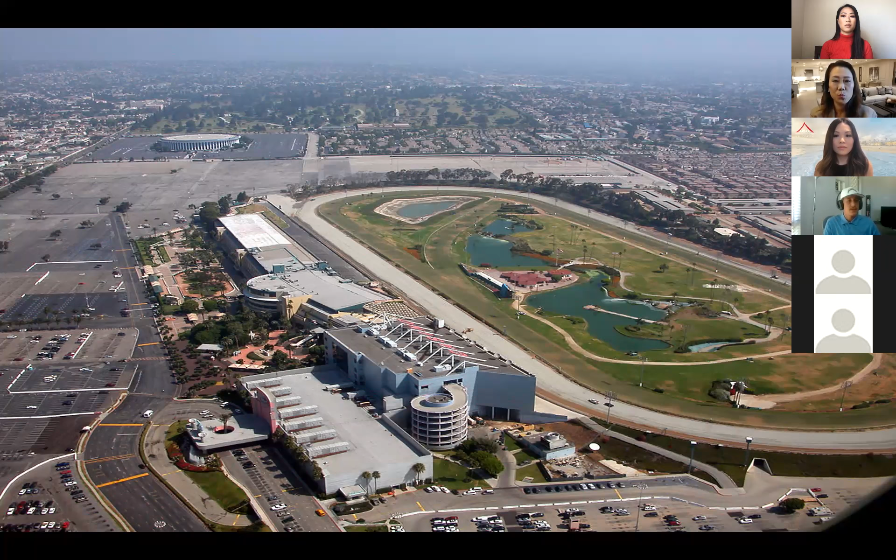So what we're going to talk about today is what this will look like in the future. And really, when we do look at this development, you're going to still see that Forum directly there to the north. So that's still here.

Big news article was out about a month and a half ago - that venue is actually purchased by Mr. Steve Ballmer, who is the owner of the LA Clippers. And so the Clippers, who play right down here in downtown LA at Staples Center, in 2024, when their lease expires, they are looking to move right down here to this plot of land adjacent to our stadium just to the south. And that is going to become their new $1.2 billion basketball arena.

So that'll really create an entertainment belt here in Inglewood where you can go and see a 20,000 seat concert, a 70,000 seat Taylor Swift concert or NFL football game or sporting event, or a 20,000 seat basketball game with the NBA, all within a block, city street block here of Inglewood.

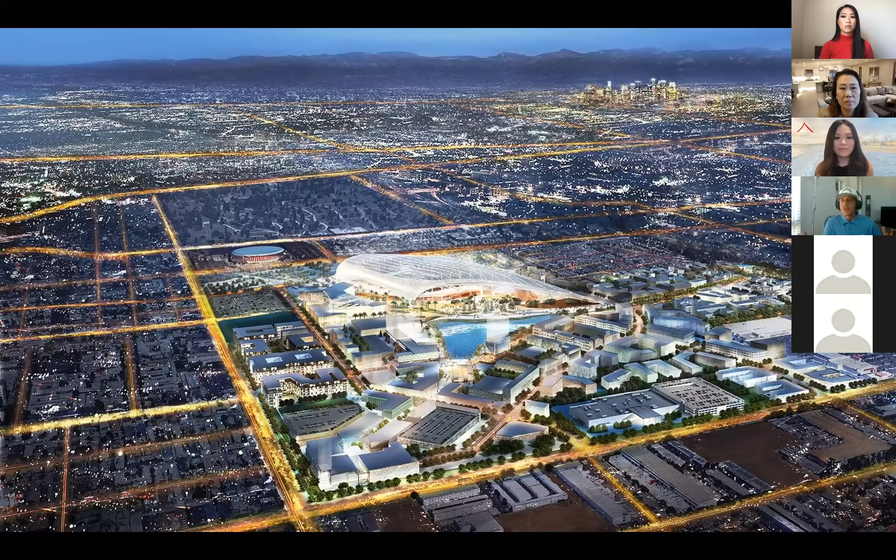And so looking here, obviously the stadium is the wow factor. That's the sexy thing that you've seen all over the news. It's a $5 billion stadium. But as Hiroko mentioned, the stadium sits on approximately 298 acres, which we round up to 300 acres for ease.

And that 300 acres is what you see here. And that 300 acres, in addition to the stadium, will include residential - anywhere from about 1,500 to 2,500 residential homes. It'll include a retail district, and it'll include a commercial district that will all augment that NFL experience and create really a 365-day product that people can come down to year round here at the stadium.

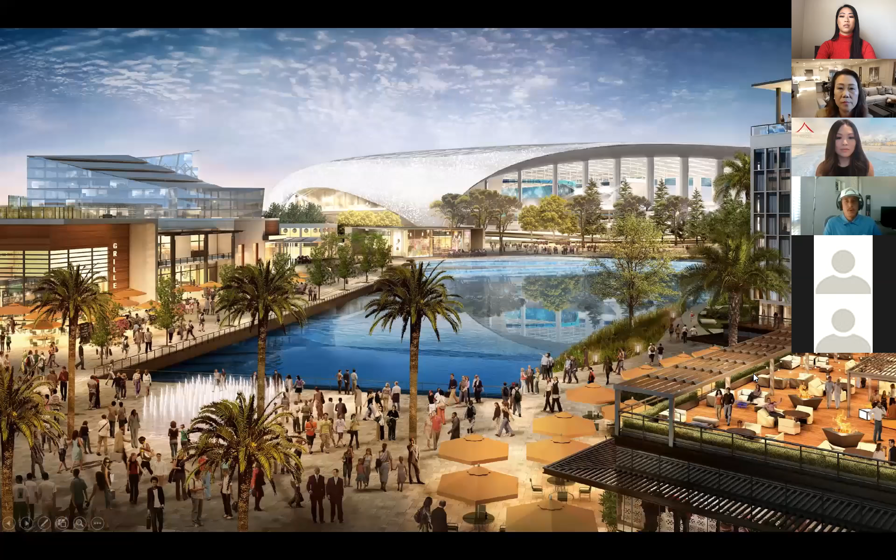Looking here at our next slide, you're going to get into a picture that really kind of showcases this district. And so when we think of the SoFi Stadium, that's our crown jewel, but really taking a couple of steps back, this lake that you see here mimics the old lake that you saw in Hollywood Park's racetrack. And that used to be a community event space where people could go and really kind of do a movie night in the park, trade shows, different types of events.

And that's what we can do here in our community space. This lake actually is part of 25 acres of parkland that connect the different districts together. And as you can see here, you have your bar, your grill. This is the hotel right across the way.

And both of these look directly into that stadium. So the stadium very much is the showcase piece, but these other components will be able to run sufficiently on their own. We expect the mall to be a 365-day mall experience, as with the commercial tenants and the hotel, which can be used year-round as well.

So when we look at this composition as a whole, again, 890,000 square feet of entitlement for retail space. You're talking about up to 8.5 million square feet of commercial. So all this commercial here can also be built on top of these parking lots.

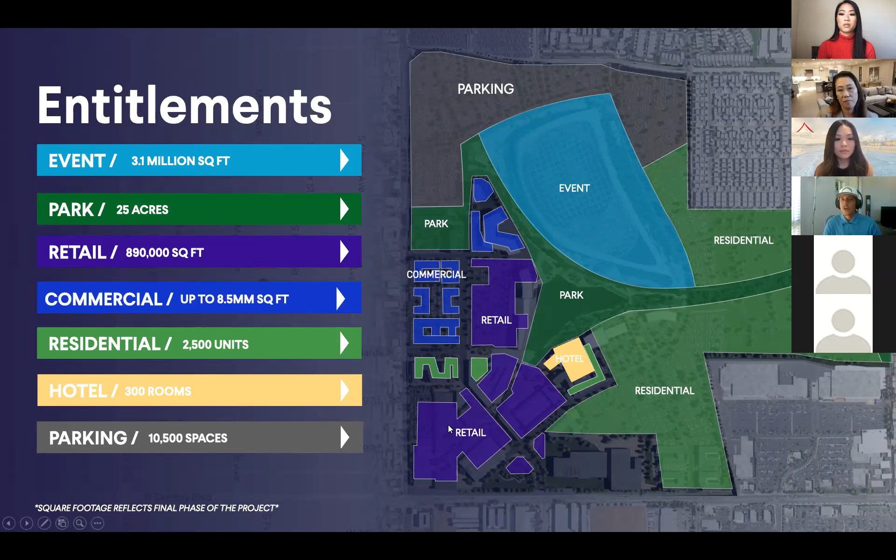You're going to want to be there for that Super Bowl week. And that Super Bowl is scheduled here for February of 2022. And that was when I would imagine that the bulk of the retail and commercial part of the construction will be complete. Here's an aerial view, and this is a view that'll kind of show you what's happening around the stadium.

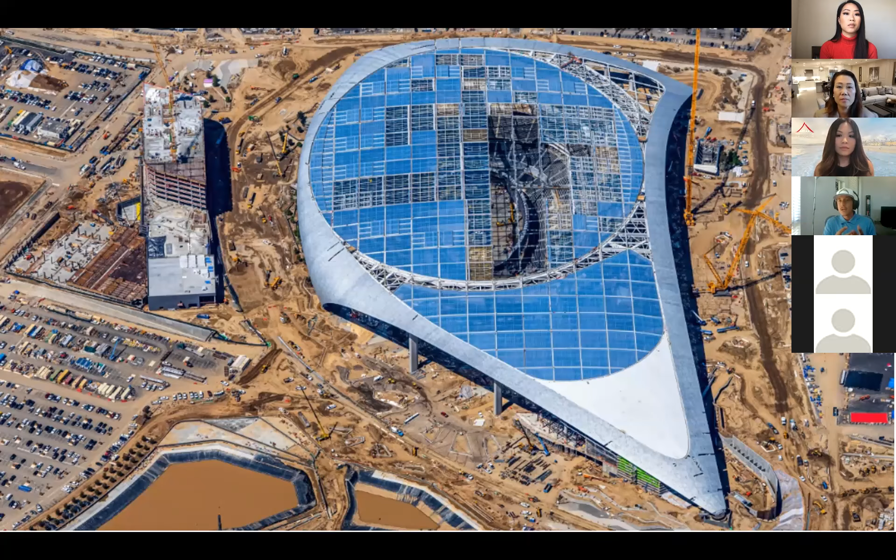And that water has now been treated and is cleaned. That water in the lake is actually runoff water from the district. So all of the rainwater will collect in that lake and be used to water all of the plants and foliage around the property. Here's a more completed version of the picture that we just saw.

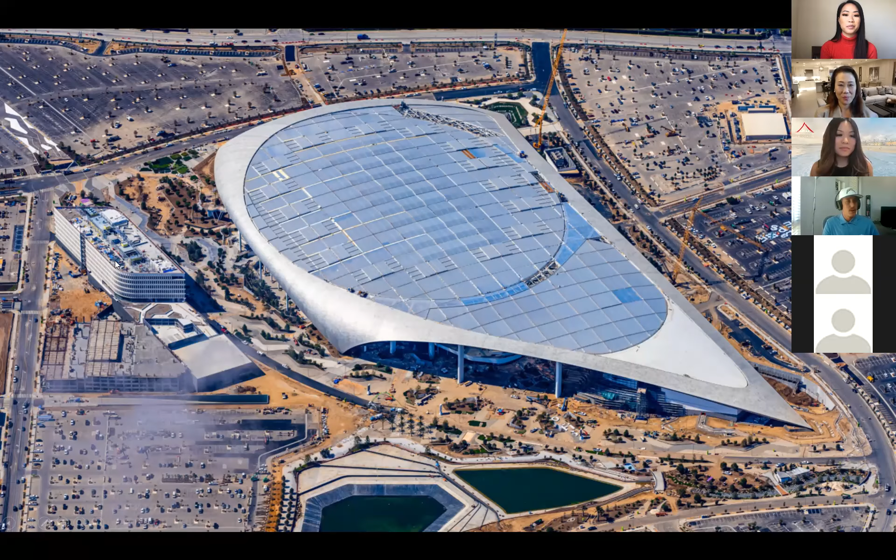And you can see the roof here, as well as that lake now really starting to come into place. You'll probably see me down there in a jet ski by the next picture, just riding across the lake. I wish. I don't think they'll be able to do that down there, but again, you see the commercial building here, the NFL Network coming along.

You know a typical commercial build out takes anywhere from about 18 to 24 months. And so as you can see here with the progress already being made, some of those buildings are going to be done sooner than later, which is really exciting for us here on the project.

The Super Bowl is coming in 2022. In 2021, we'll have WrestleMania, which will draw 100,000 wrestling fans from across the globe to Los Angeles. In 2023, it's the college football NCAA championship, the college football version of the Super Bowl, with 100,000 fans from Clemson and 100,000 from Alabama - sorry if anyone here is from a different school - but those are the big schools coming here to experience Los Angeles.

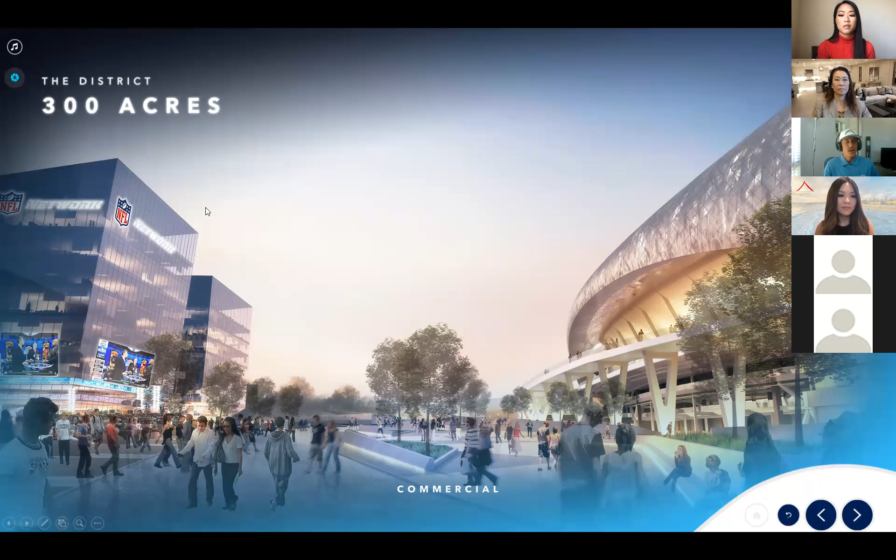So here from the NFL Network building, this is a year-round showcase. We can invite fans from not just the Chargers and not just the Rams, but every one of our NFL teams across the United States can come visit Los Angeles to be part of this NFL Network experience, which is very important to us.

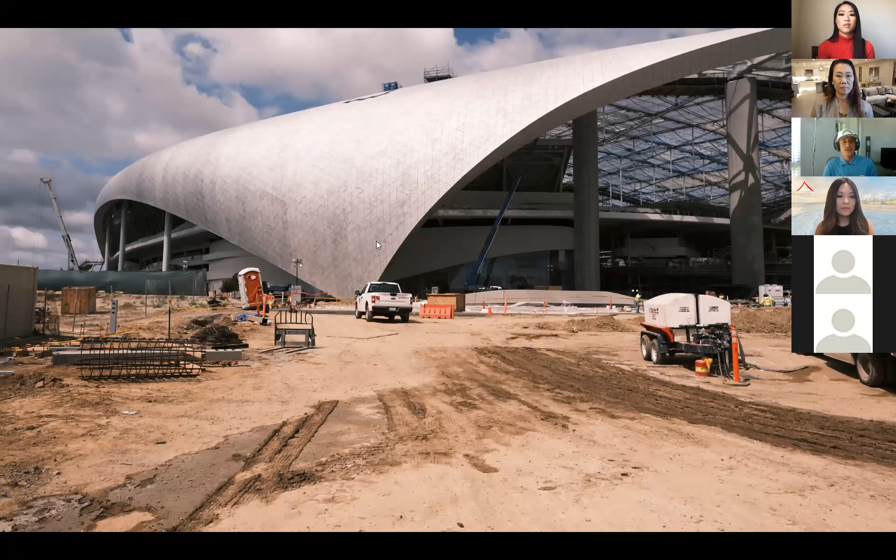This is a view walking into the grand entrance of the stadium - the grand foyer that you would walk into. You'd walk in from that bar or restaurant and then walk right up that stairway into the actual stadium, which is very exciting for us to see that type of progress being made.

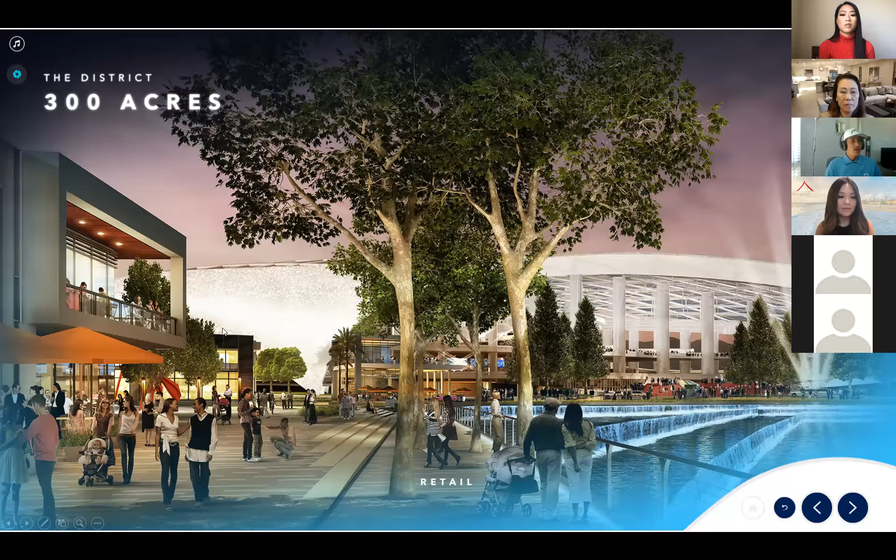Looking at the district, we're very excited to see other components come together. But the stadium itself, obviously with COVID, we've seen a couple of hiccups in our timeline. We were supposed to have our grand opening here this weekend - Taylor Swift was supposed to be here Friday and Saturday for a two-day music concert. I was at the stadium a couple weeks back, and you can see I'm one of maybe 50 people in the building. It's kind of eerie to walk through a place that's supposed to hold 70,000 to 100,000 people with only 50 in it. But one day we'll get there.

This was a picture from last week during Pride celebration when we were able to light up the video board, and we've now gotten the floor in there - we have the turf down and we're ready to play some football whenever we're able to get that go-ahead.

I do want to give you guys an update on the COVID situation and where the teams are, to let you know. Obviously COVID is a big thing, not just for sports, but for our entire community.

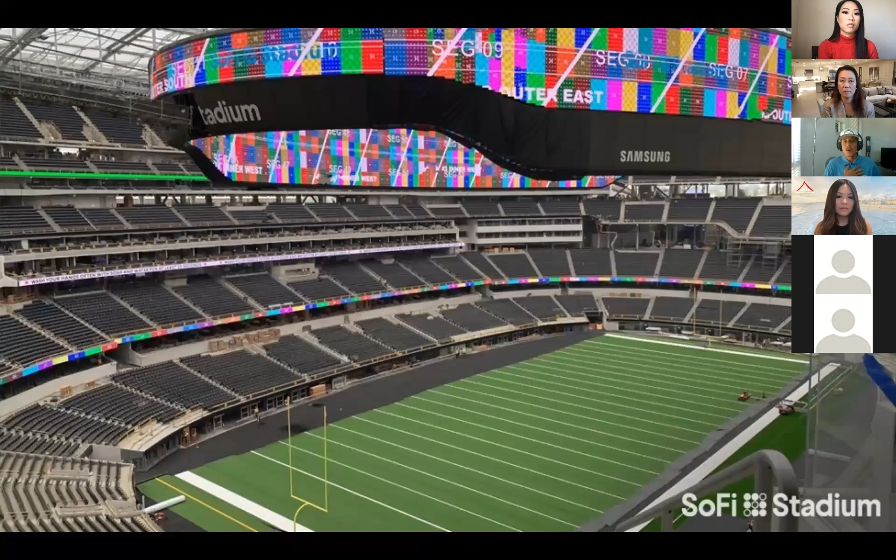The NFL is obviously fan friendly first, so you won't find an instance where our fans, me, our personnel, or our players are ever put at any risk. But looking at this stadium, you can tell it's coming along and really getting to the point where we're ready to start playing some football in there.

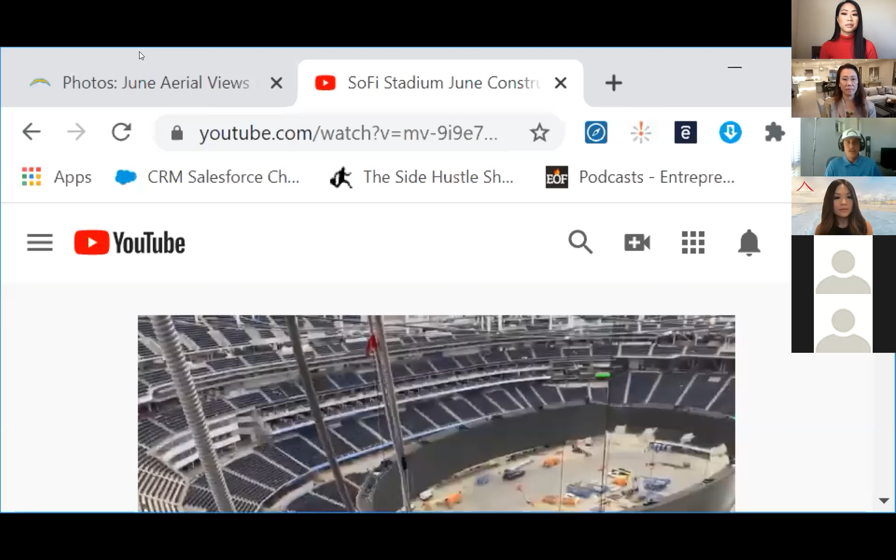I want to share one quick video with you guys here, just a quick construction update video. This is our June update from what we're doing here at the stadium. Want to make sure I got the right screen shared. So here we go. Are you guys seeing this video?

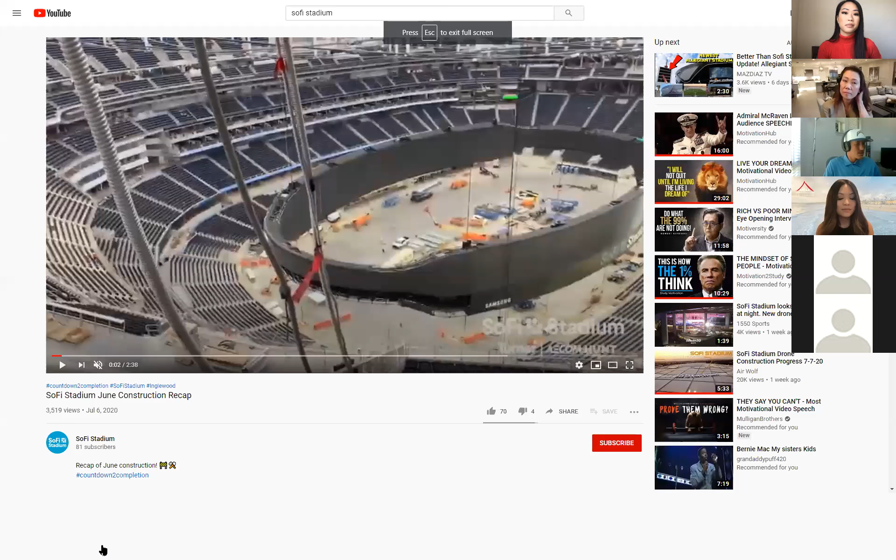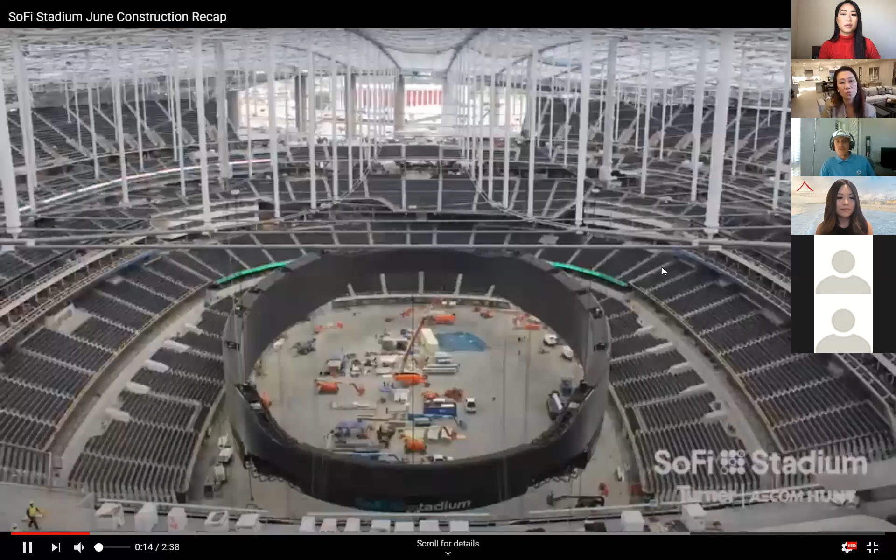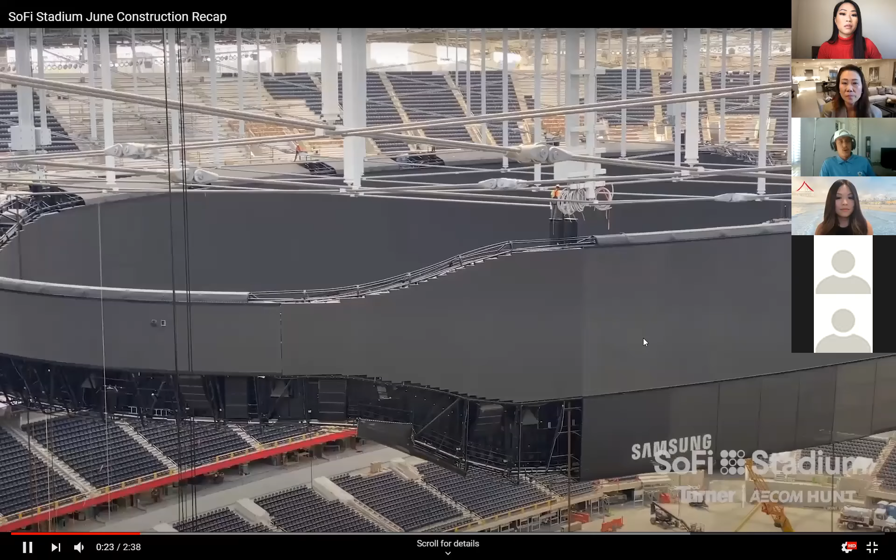What you guys see going on right here is our video board actually being lifted up into place. That video board is 3 stories high and will provide an absolutely phenomenal experience. Think Taylor Swift. When you're at a Dodger Stadium watching Taylor Swift, there's a big video board out here in the outfield, and if you're one of the fans over here, you have a really far view of that video board. Here, this video board is dual-sided, there's video inside and outside, so wherever you are in the building, you're going to get a phenomenal view.

We saw the roof from the outside in the picture I showed you earlier, and when you look in from above, from an aerial view, what you're seeing is this component called ETFE. ETFE is a polymer that when the sunlight comes down and hits that roof, 50 to 65% of the UV rays are going to deflect back out. UV is what you typically associate with the harmful effects of sun, so we are going to be deflecting the majority of the UV back out. But as you can see here, you see the clouds, you see the blue, so when you're inside, you look up and it looks like a normal day.

This ETFE material, although it's a heat resistant and weatherproof polymer, looks very much like glass or plastic. It's got this translucent look to it, so you look and feel as if you're outside. You'll see these pillars here that support that roof. We very much are outdoors. This is the world's largest outdoor covered venue, so you do actually get that natural breeze when you're sitting inside.

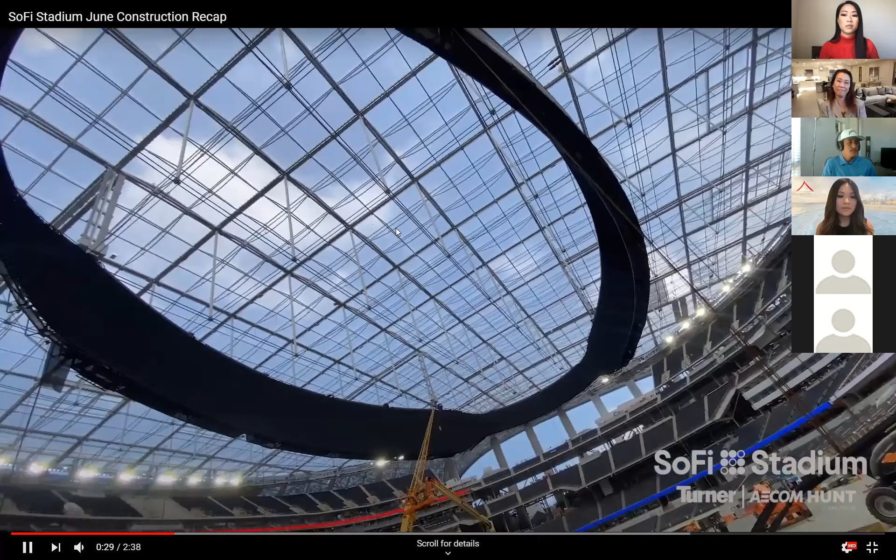Will, it looks like we have one question: are SoFi's screens larger than Dallas's?

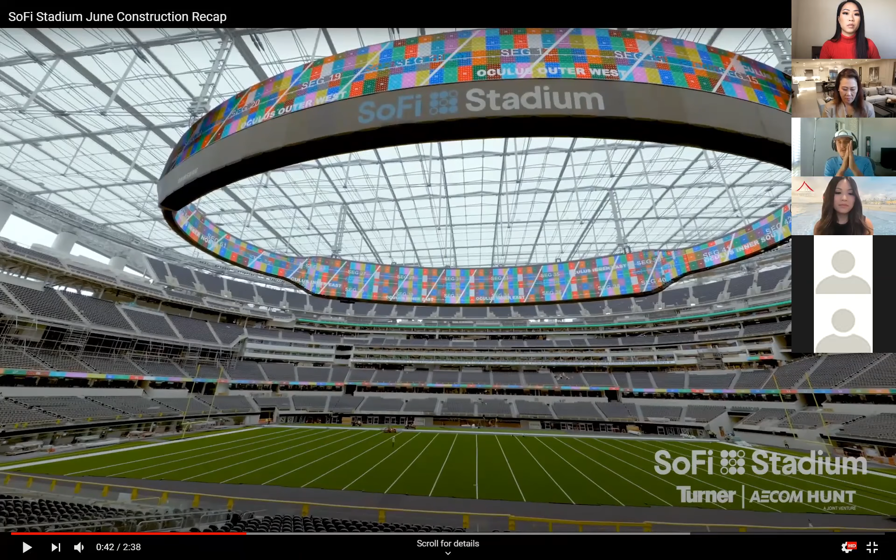Great question, guys, and it's a perfect stopping point right here. So everything's bigger in Dallas, right? Not anymore, we can take that prize back here for us in Los Angeles. The Dallas Cowboys Stadium runs about 109 yards, ours goes 127 yards. The other difference is Dallas's video board is flat, so it only has one side that can be seen here and one over here, which means if you're one of the fans in certain areas, you're not able to look up and see that video board because it's flat right above you. So this video board is actually wider and longer than their video board in Dallas, as is the stadium itself - the Dallas Cowboys AT&T Stadium would fit inside of our stadium.

A couple things coming bigger for Los Angeles for us, and that's why we're excited to have the Olympics. This is the biggest stadium in the country.

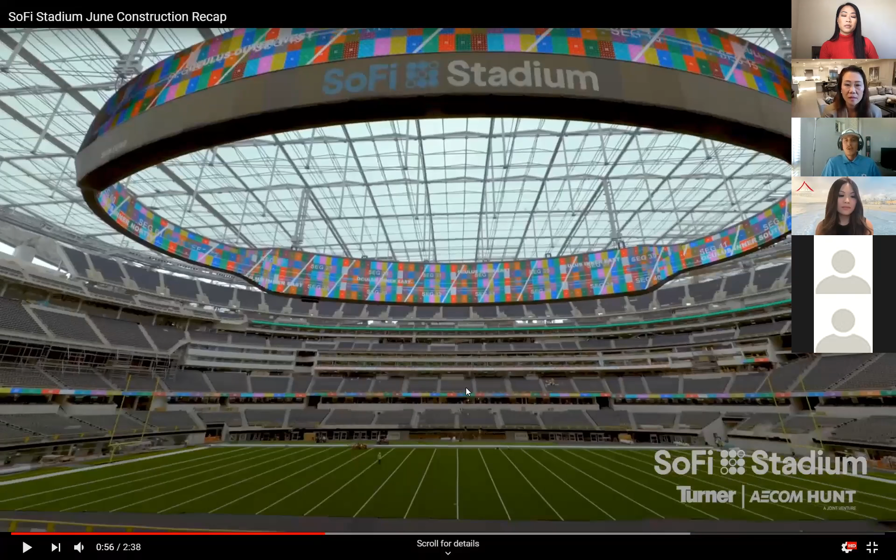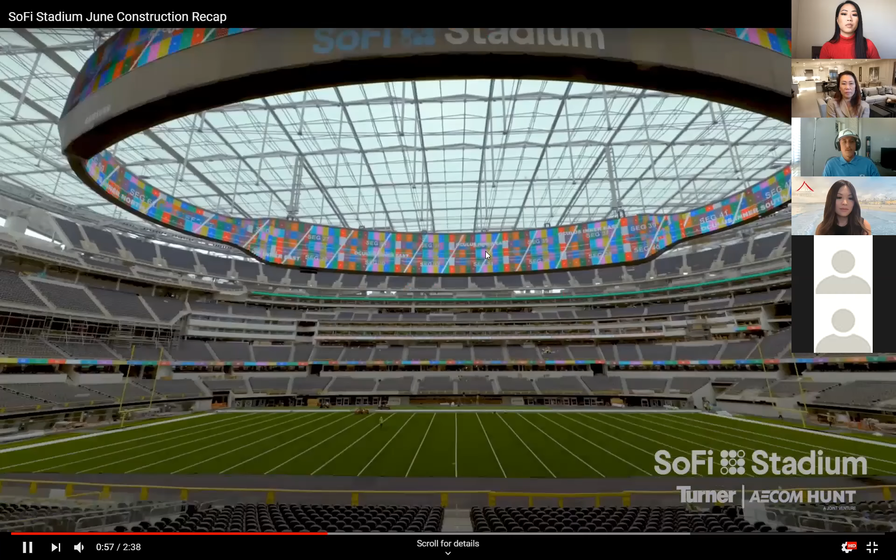Here we're just looking at some views down on the field, so you can see, again, we've put in the turf, and this is what the players are going to look up into as well. You guys forget the excitement that a player gets when they're at a baseball game and they crack a home run and they see that up on the video board. A player is going to be running down the field here and look up and see themselves in that video board running on their way into that end zone. So very exciting for us to see that board finally get lifted up into place there in the stadium.

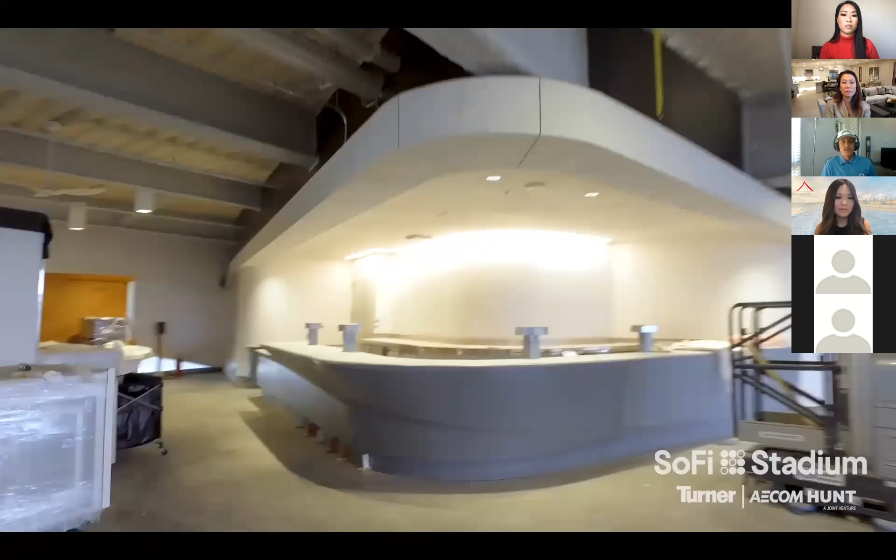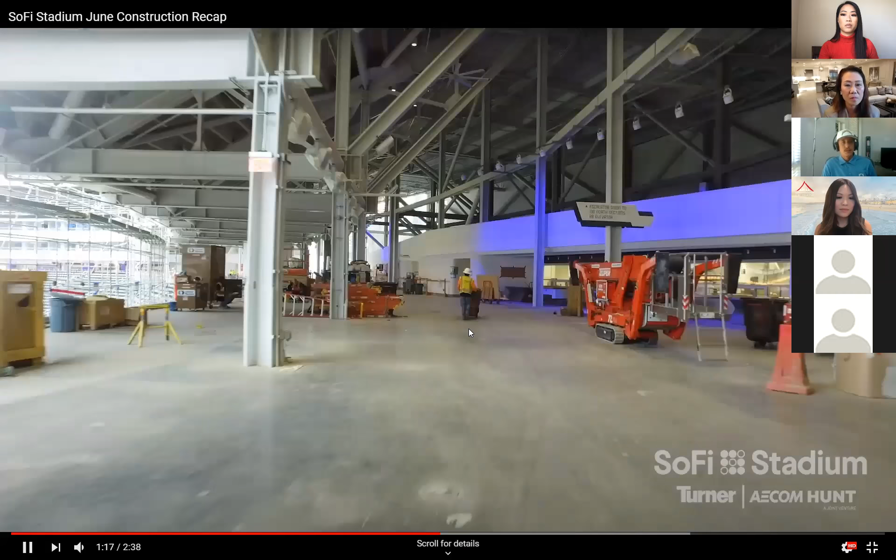We're going to go inside of the building now, we're going to walk through one of our club spaces. This is underground in the building. This is actually where you would go and buy your food and beverage at one of these bar spaces and then walk out here to actually see the video and see the game. Our stadium is set up in a way that 100,000 people will be here for the Olympics, but only 70,000 people will be here on Charger Sunday. So when you see all these spaces, they're massive.

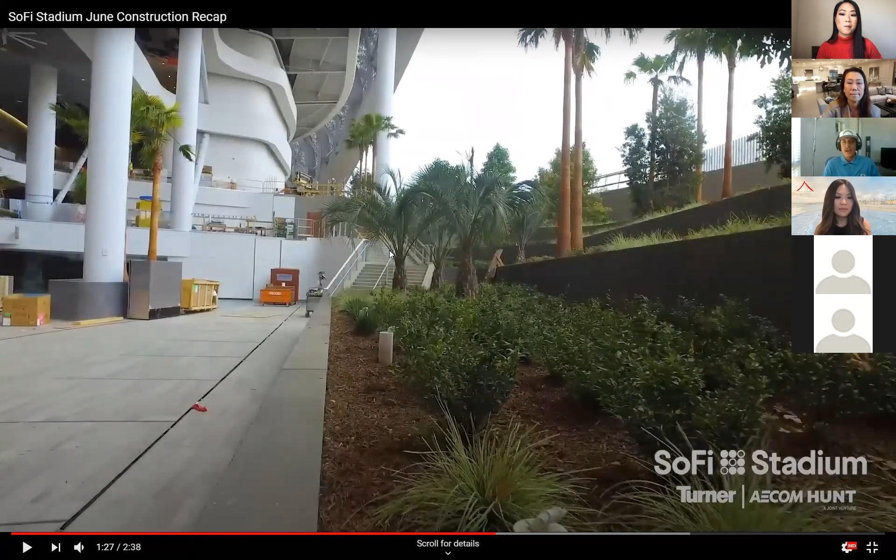This is where I took that picture looking out at the NFL Network building, right up over here. You see the trees, the final touches—as you guys know, when you start landscaping a house, it means it's up for sale pretty soon after that. So we're getting very close to this development coming to a conclusion.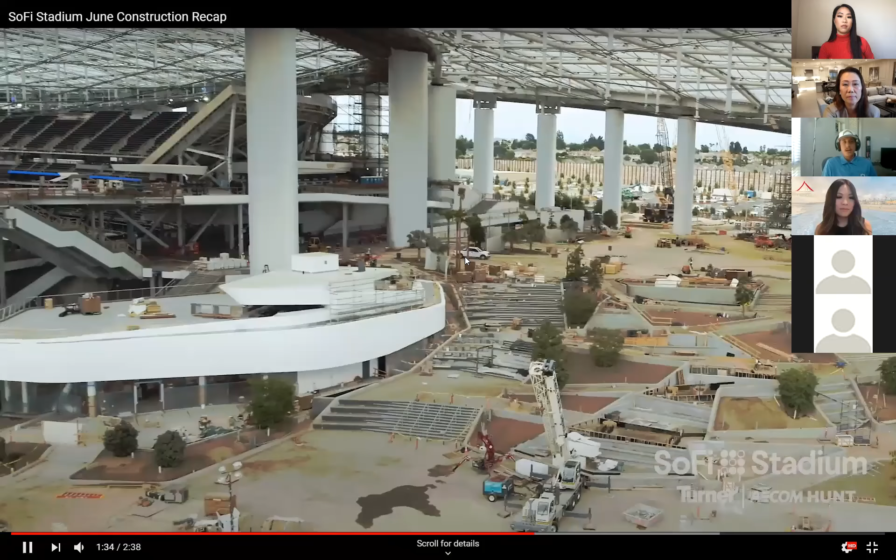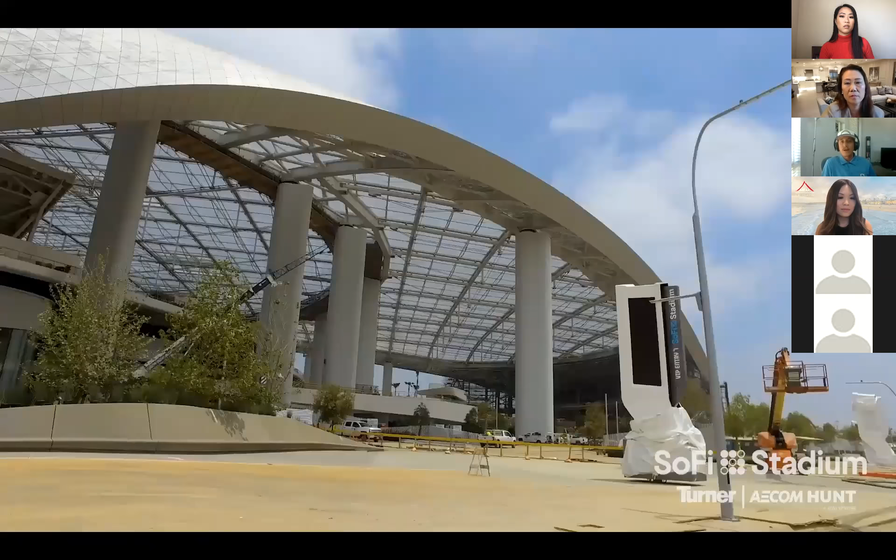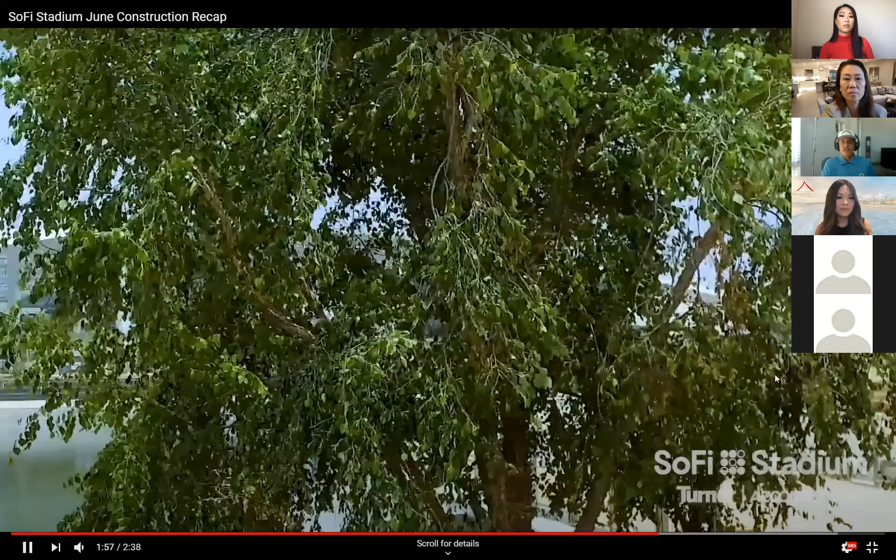Looking out here now, you're going to see the entire rest of the district, which is what I wanted to showcase for you guys, because this is where construction is taking place on the residential grid, which will be the future home of 2,500 new homes. You're also seeing the NFL Network here in the background, but this is all landscaping where future homes and residences are going to be adjacent to this lake and these park spaces that are now nearly completed.

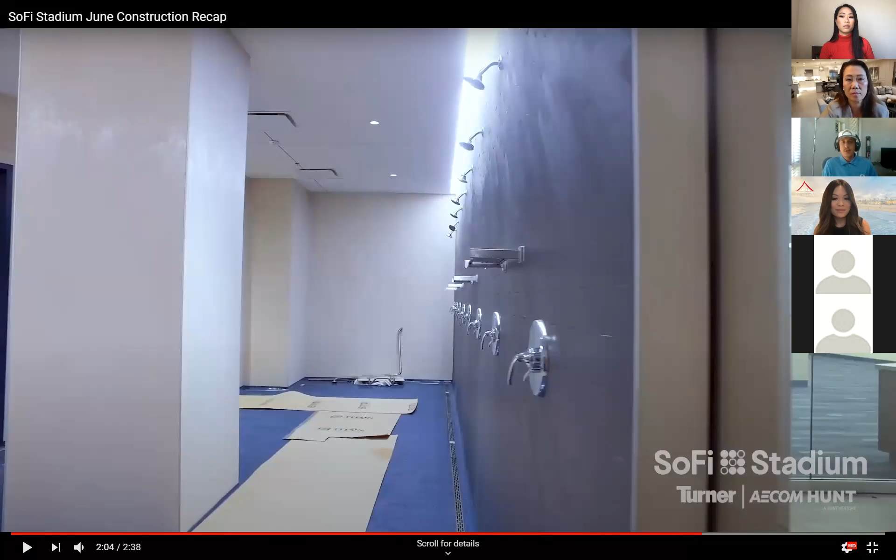Again, when we talk about the development, there's really 3 phases to it. The first phase is now coming to a head, and we're seeing some progress on the rest of those phases as well.

The last thing I'll share with you guys is this Hollywood Park Life page, which you can go to on your own. If you have interest in staying up to date on the project, you can get information here on the project, on the residential side of the district, and on the retail side of the district. So this is where we really showcase the project to the public.

And again, this is what we were just looking at—2,500 homes coming on the eastern part of the acreage. You're starting to see those parklands that'll connect all of those completed now. So very exciting for us on the project.

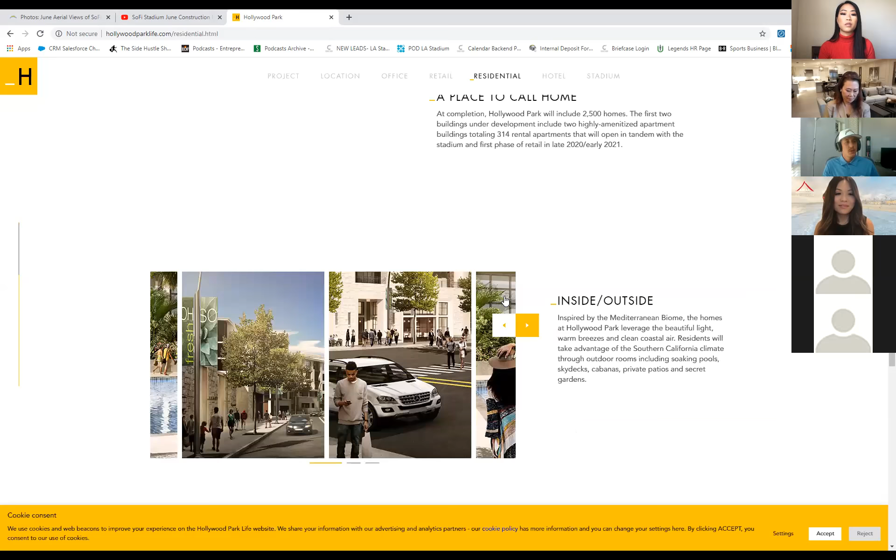Great question, and I know we have a lot of realtors in the room, so obviously the housing is a big question. When we look at the housing, you're going to have some of it that's more than likely for rent—I'd call those more of your live, work, play style housing. If you come down here to Playa Vista, where my office is, we have the Runway Apartments right nearby.

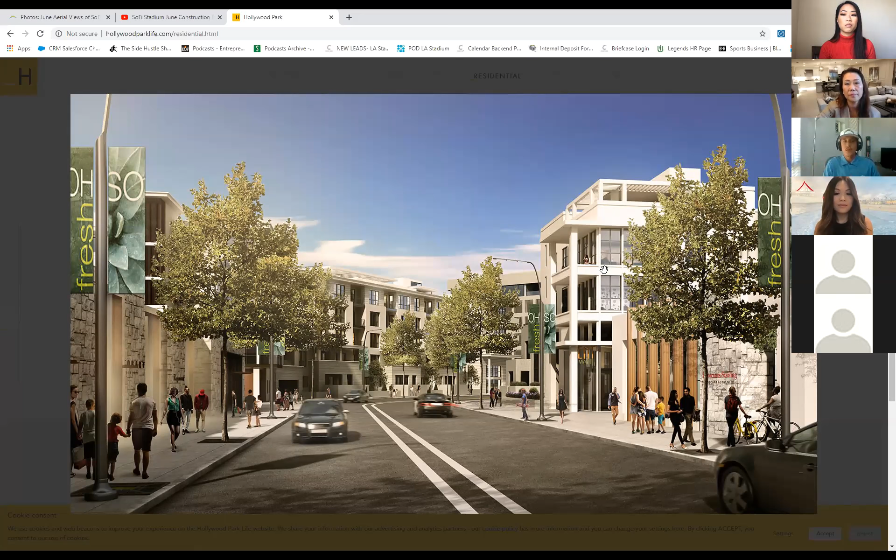And those are apartments that are on top of commercial, so you'll have a CVS, a yogurt spot, maybe a bar or a restaurant. Then on top, residential units where this would be live, work, play for an executive who maybe works nearby in our commercial district and wants to stay close by in the district for their housing. The rest of the district—that's that first little grid that you saw right here.

This is maybe call it 150 to 250 homes. The bulk of the homes on the eastern panhandle are still up in the air. So obviously, rent control being introduced in Los Angeles and Inglewood plays a big portion in that.

And you guys are active in the real estate market, and you've seen the growth in this area specifically over the past, call it 5 to 7 years. We've seen an increase in home prices here in Inglewood anywhere from the 50 to 75% range. So really, for the development, there's no rush to build those houses until we get a better understanding for the rest of the district.

Is there more need for commercial? Is there more need for housing? Since I've been on the project, I've seen this number, 2,500, jump from 1,500 to 3,500 to 2,500. So it shifts pretty regularly.

And again, when we look at our 3 phases, it's opening day of the stadium in 2020, 2021 for the retail and commercial, and then right after that would be the housing. So you should start to see some clarity on that question in the next coming months. I would imagine the hotel will be announced, and some of those housing partners as well.

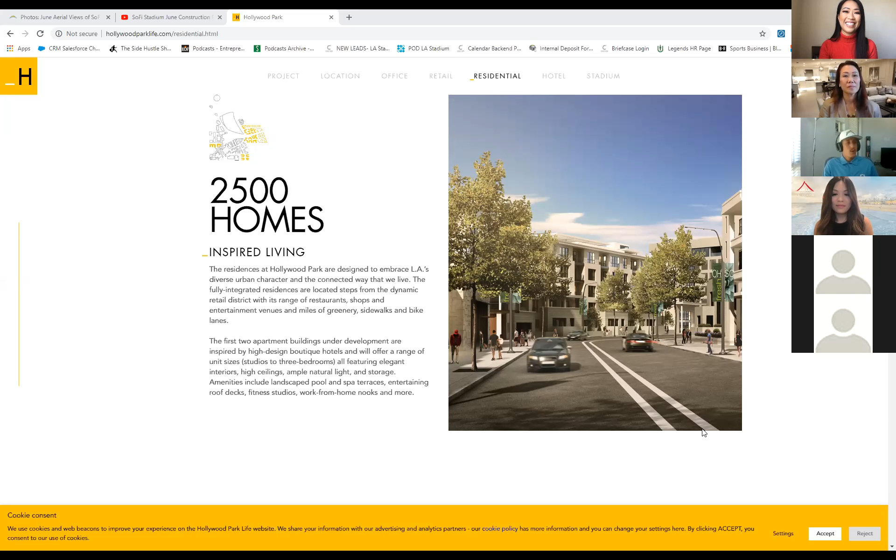Awesome, and then we have another question: who will be selling the housing? Great question. The team in charge of the project is the Kroenke Group. Mr. Kroenke owns the Rams, the Arsenal Football Club in Europe, the Denver Nuggets, and the Avalanche in Denver. He's a real estate developer at heart, and owns a couple of teams as his side project. So Mr. Kroenke and the Kroenke Group, with Wilson Meany and CBRE, are our partners right now. It very well could get outsourced to local realtors in LA if they decide to sell, or if they decide to rent, they might keep it in-house or use an agency. So still a lot of questions up in the air on that.

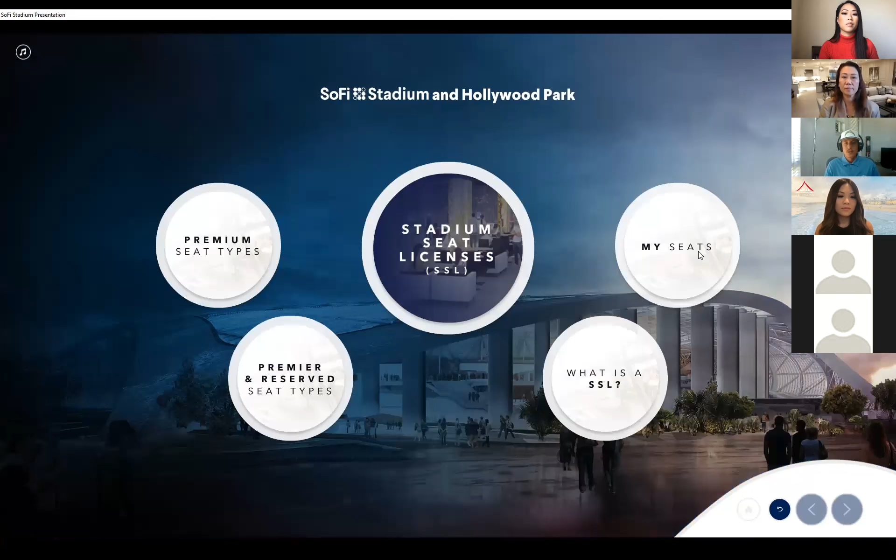Awesome, last question: how was the project funded, and what were some of the challenges the EIR presented? Great question. The stadium itself was funded through two sources—first our owner, Mr. Kroenke, and second through our seats. The seats here in the stadium all include a seat license, ranging anywhere from $100 up to $75,000, and that money goes towards developing the stadium. So that $75,000 for this seat is what would go towards developing the stadium. The stadium cost $5 billion—a portion paid out of these tickets, and a portion by Mr. Kroenke and the Chargers ownership group.

Any other questions before we hand it over, or any closing remarks, William, that you wanted to share?

Yeah, again, I appreciate you guys having me out here to give you an update on the project. Hiroko and I were planning on doing this at our stadium event center, so just know we want to keep you guys up to date—this is a large development here in LA. Any questions you had in the chat, I wrote those down, and as soon as I get answers I'll forward those along to the group. I'm also going to put my contact information in the chat, and if anybody wants to set up a virtual coffee and learn more about the stadium, I'm happy to set up times as I'm working from home over the next couple of months.

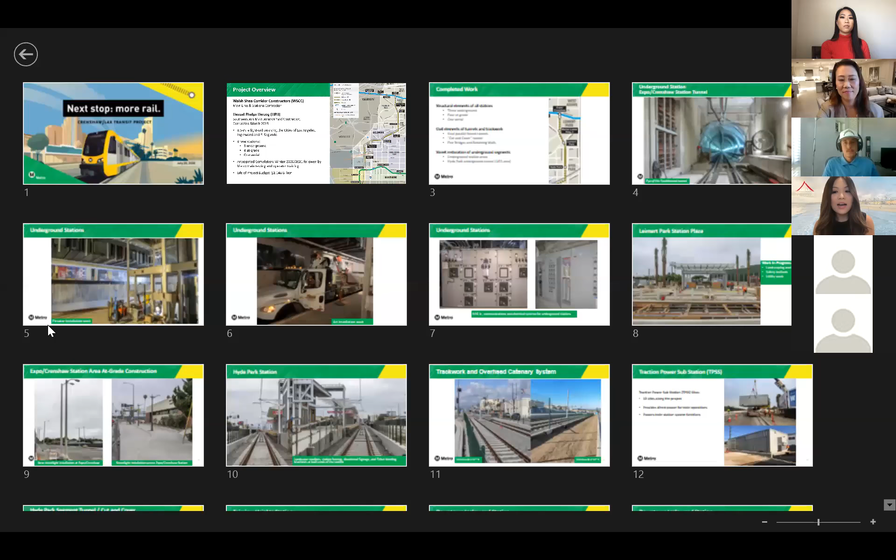So our next speakers are from LA Metro, and we're fortunate to have with us today Annette Cortez and Nicole Avita. Annette Cortez is the Community Relations Manager for the Crenshaw LAX Transit project, and she'll be discussing that project. We also have Nicole Avita, Manager of Transportation Planning for transit-oriented communities, and she'll be discussing LA Metro's Joint Development Program and how it relates to housing in the LA region. Nicole and Annette, we're ready for you guys—thank you so much for joining us.

Thank you. I'm just finding my unmute button. Can you hear me now?

Good afternoon, and thank you for having us. My name is Annette Cortez, Community Relations Manager for the Crenshaw LAX project. My team works between the technical team, which is the contractor, and the community—so we have a tough job.

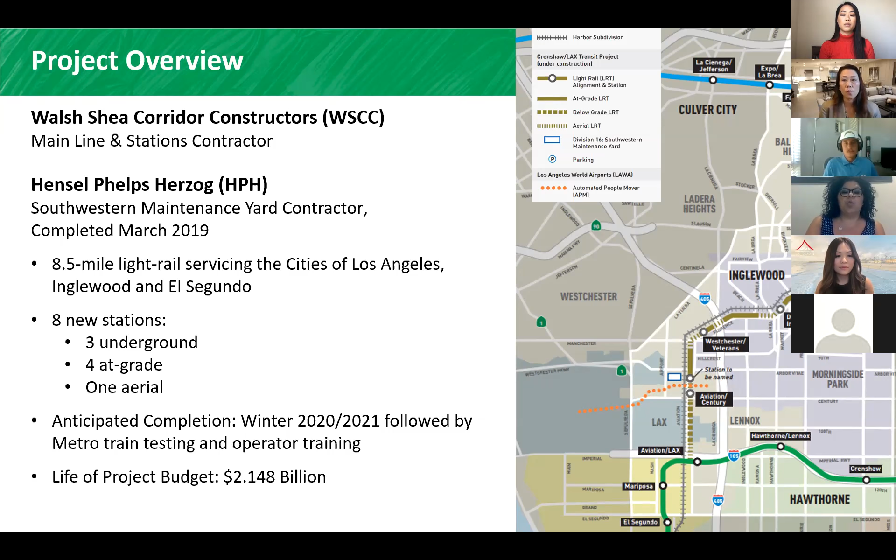This project is anticipated to be handed over from the contractor to Metro in the winter of this year. Following that, Metro will require a couple of months to do train testing and operator training. The life of the project budget is $2.148 billion.

The structures that have been completed are the 3 underground stations, the 4 at-grade stations, and an aerial station. On the side here, you can see the map of the underground stations.

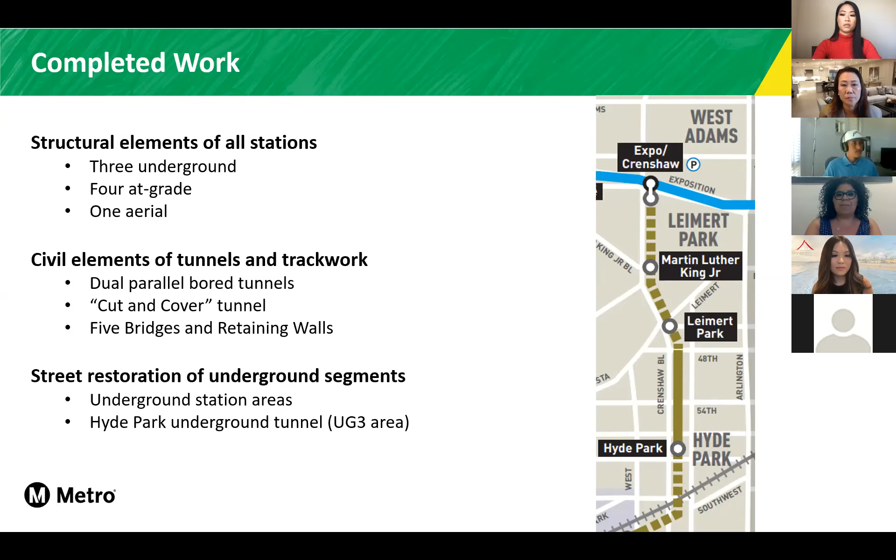The civil work that has been completed includes the dual parallel tunnels underground, the Cut and Cover Tunnel, also an underground area on Crenshaw Boulevard, and 5 bridges and retaining walls, which are the overpasses. Street restoration has also been completed, though we still have some major final restoration pending.

I added a couple of pictures so you can get a peek at the underground. This is one of the tunnels at the Expo Crenshaw station, southbound tunnel. These tunnels are about 20 feet in diameter.

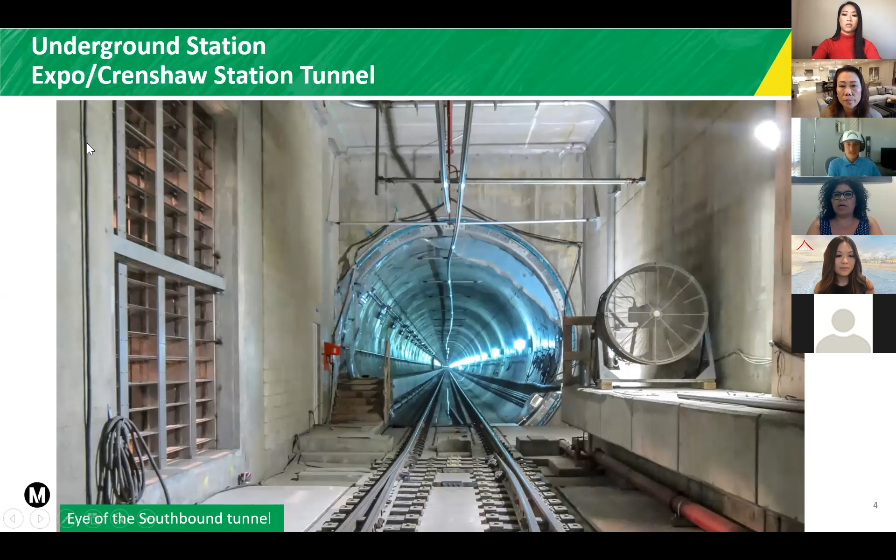This is another picture of one of the underground stations. In the background, you can see that some of the artwork has already been installed. That's an elevator shaft.

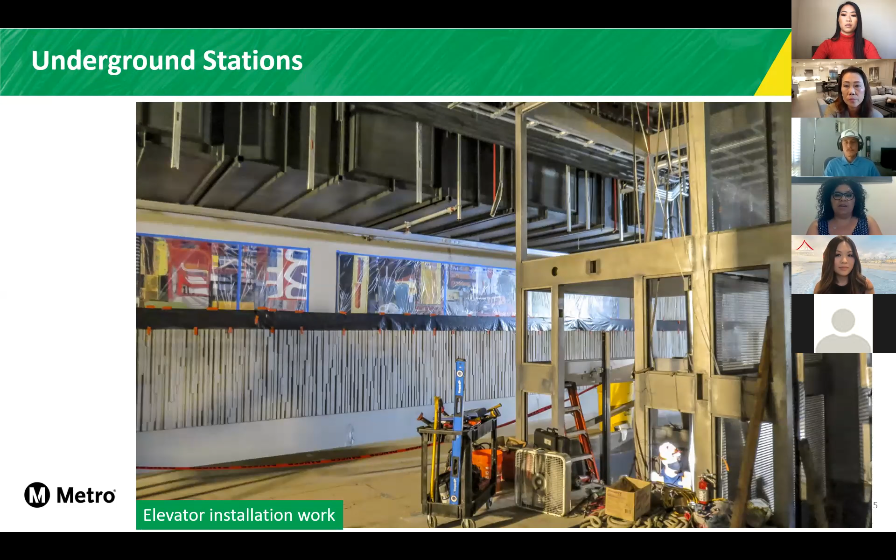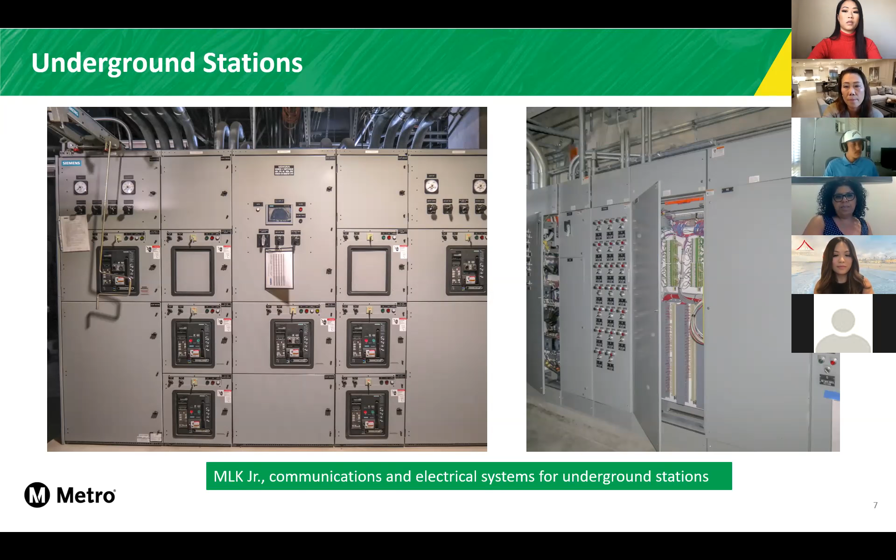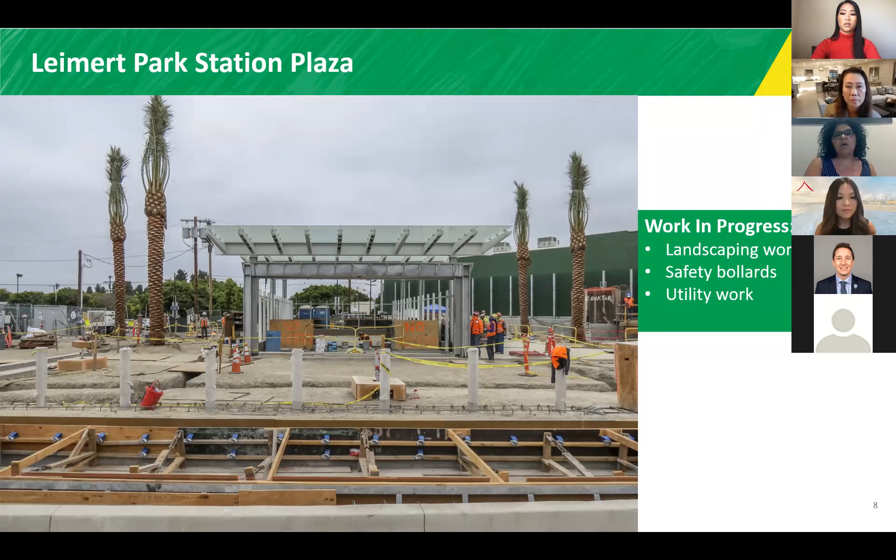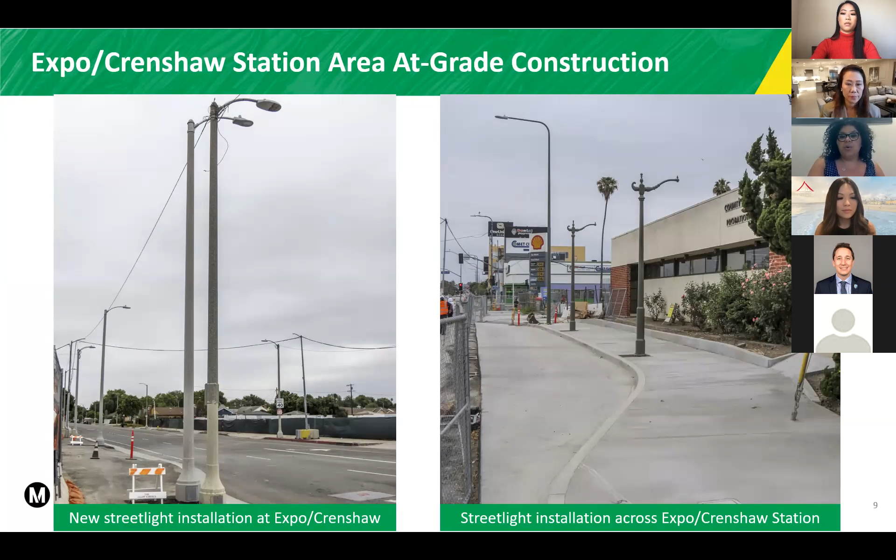As part of the underground stations, there's also street restoration that is a component of that work, mostly curb and gutter, brand new curb and gutter along Crenshaw Boulevard, sidewalks, streets, new light poles, some newly installed for our at-grade stations in terms of security so that pedestrians can access the station safely.

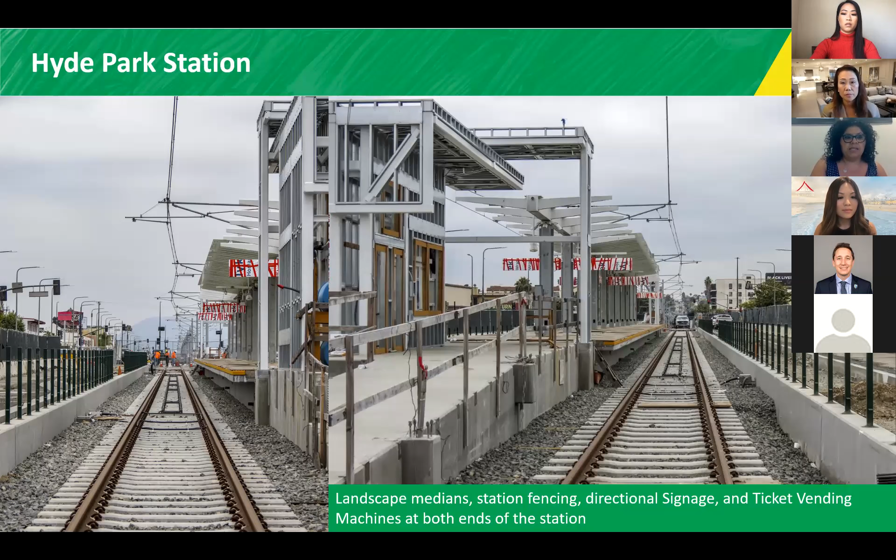This is Hyde Park Station. As you can see, it's pretty much built out. These are all the canopies, the ticketing areas, and this station is on Crenshaw and Slauson.

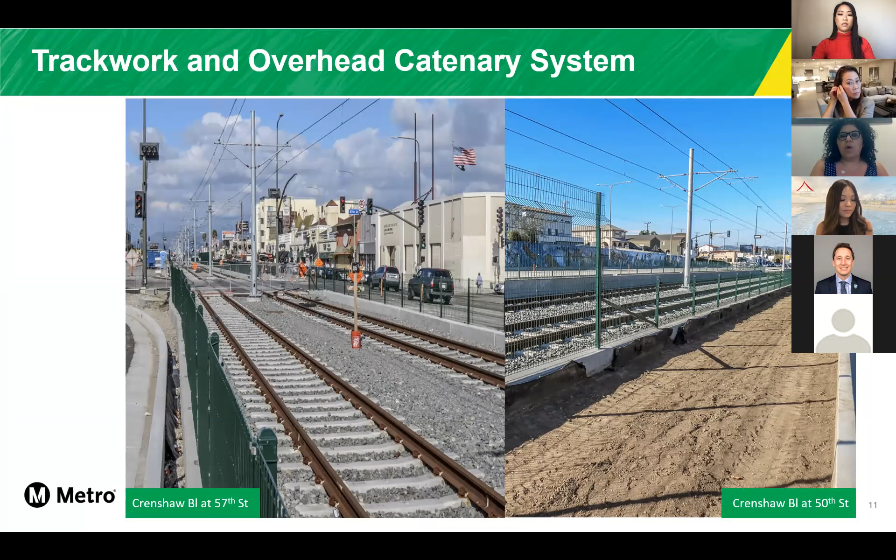Here you can see all the track work has been completed. This is also along Crenshaw Boulevard and 57th Street, and 50th Street on the right. All the overhead catenary system, which is all the electrical that runs the power.

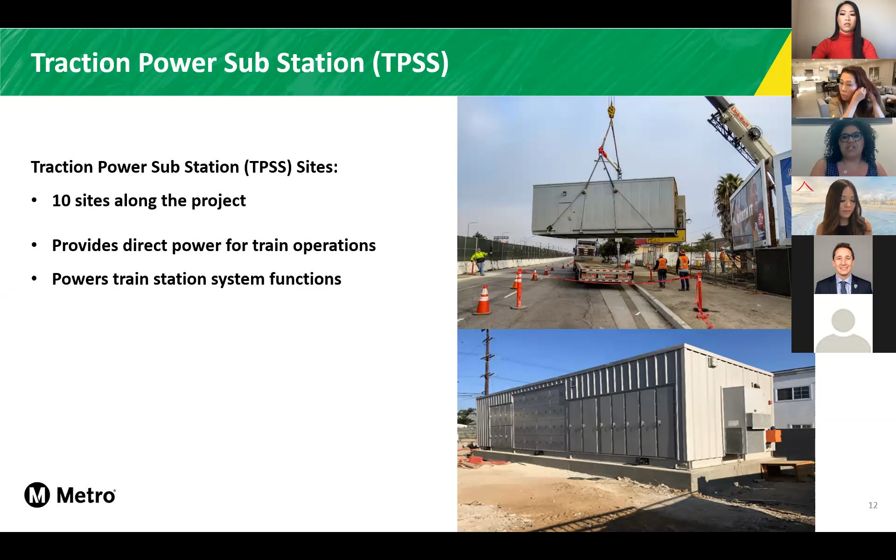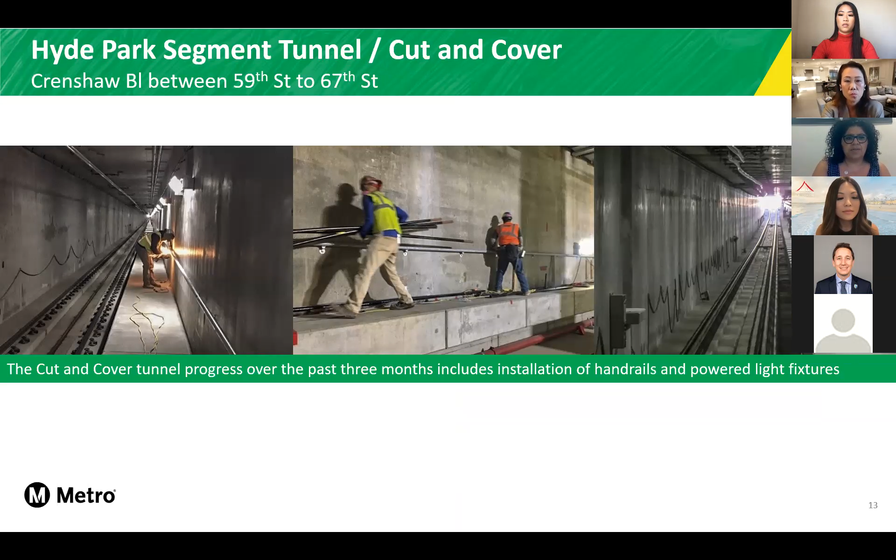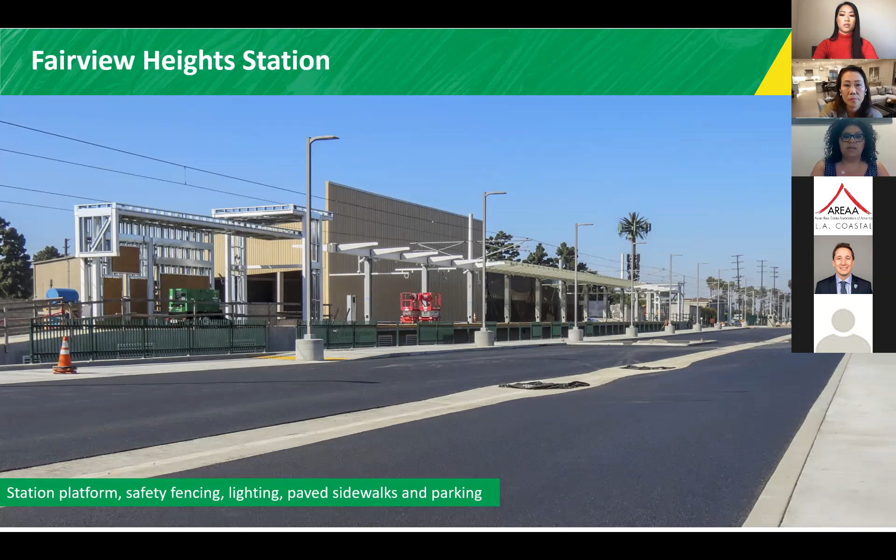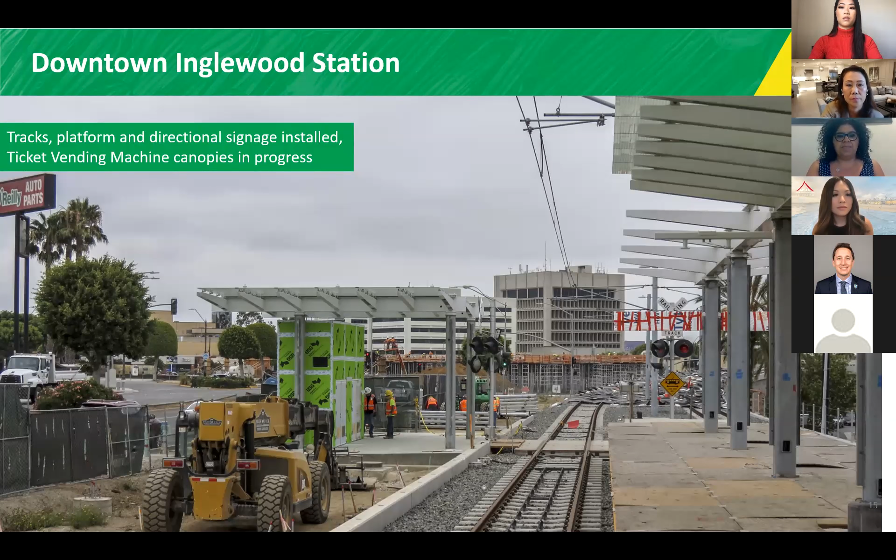So there's lots of discussion around this station. There's also a park and ride in this area, and this will probably be a large hub for pickups, drop-offs, buses, maybe shuttles going to the stadium.

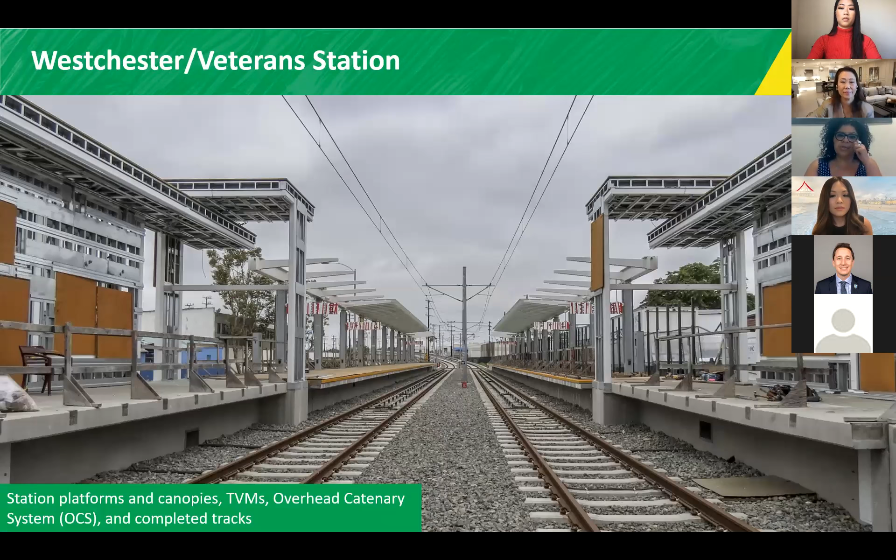This is also the Westchester/Veterans station. You can see the sidewalk there is all ready to go. Safety measures, more structures, canopies.

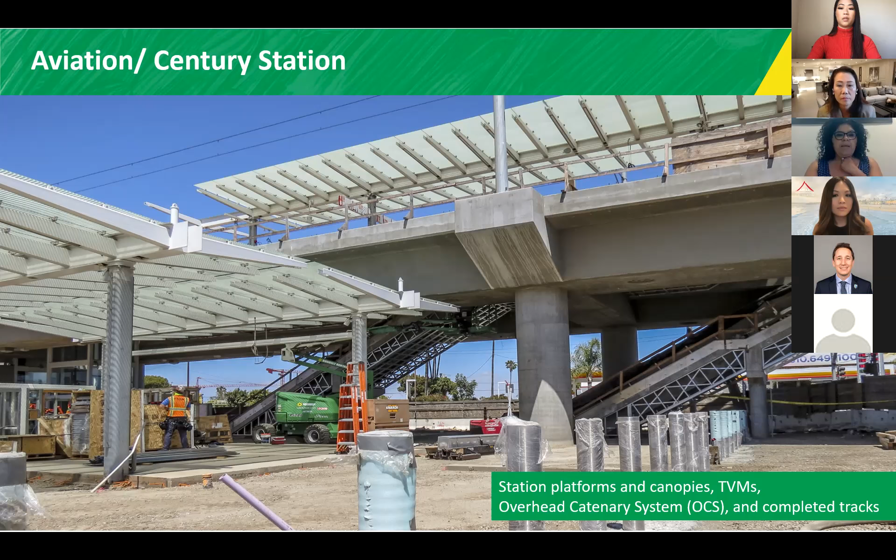This is the Aviation and Century station, on Aviation and Century. This is the aerial station. Again, you can just see all the build out.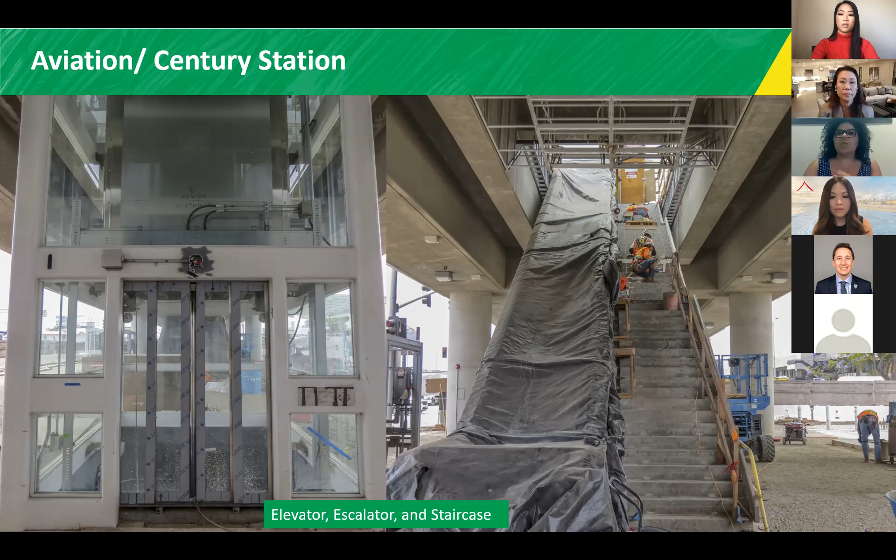Between the last station and this station, there will be an additional station known as the Metro Airport Connector. It's a separate project, but Metro is building it, and that will be on Aviation and 96th Street. That is the station that will allow riders to access the LAX People Mover, a separate project that LAWA is building.

And that LAX People Mover will go into the terminal and also access their consolidated rental cars. At the end of last year, we began train testing different components of the system. In the background here you see the maintenance facility that's also part of this project, where the trains for the LAX transit project will be housed, and also for the Green Line, C Line now.

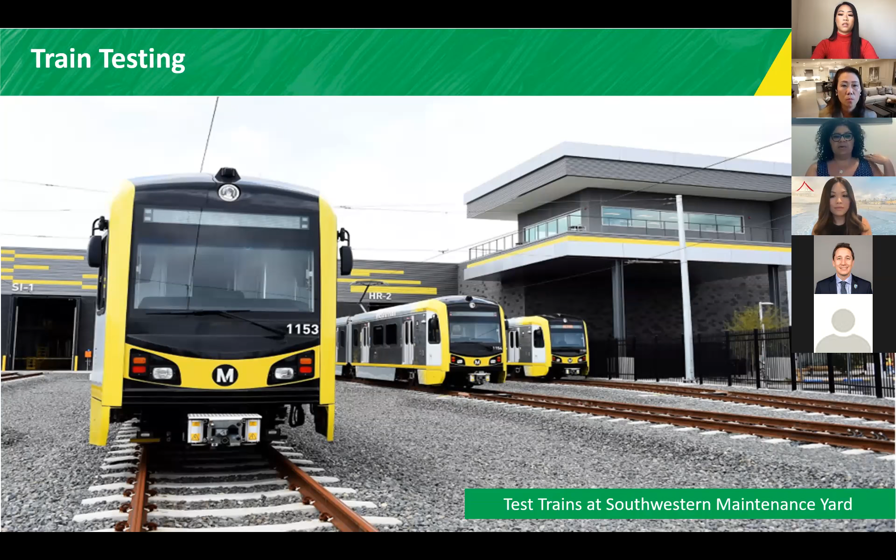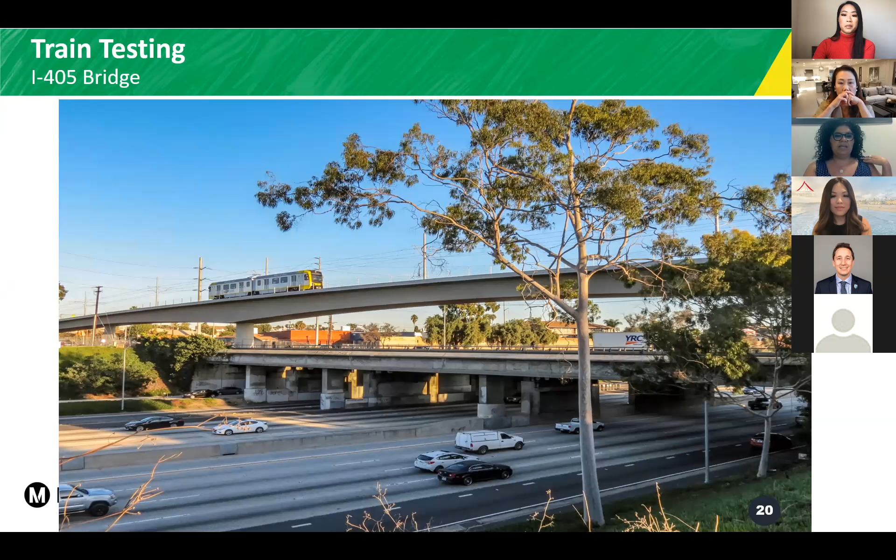This is one of our trains during a recent test going over the 405 bridge. This is very exciting. Here are some more pictures of trains during our train testing. This is in Inglewood.

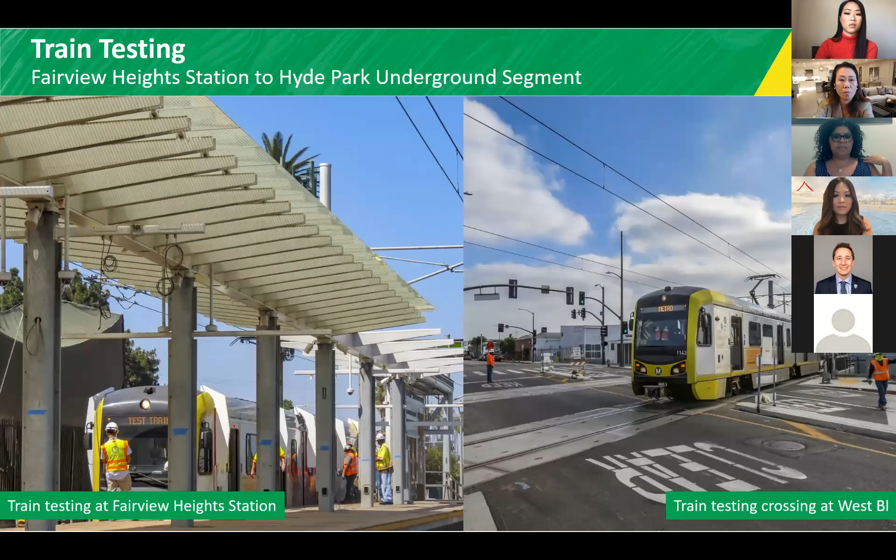Some of the remaining work is ongoing installation of communication systems and testing. Once the contractor completes their project, Metro has to also repeat most, if not all, of the same tests to make sure everything is working, all components are working appropriately and safely.

Underground ventilation systems, roadway restoration coming up in the next 6 months, which will require lane closures.

So good afternoon everyone, my name is Nicole Velasquez Avitia. I'm a manager in Metro's Transit-Oriented Communities Department. So TOCs are places that, by their design, allow people to drive less and access transit more. TOC maximizes equitable access to a multimodal transit network as a key organizing principle of land use. And this is taken directly from our TOC policy, which was adopted in July of 2018.

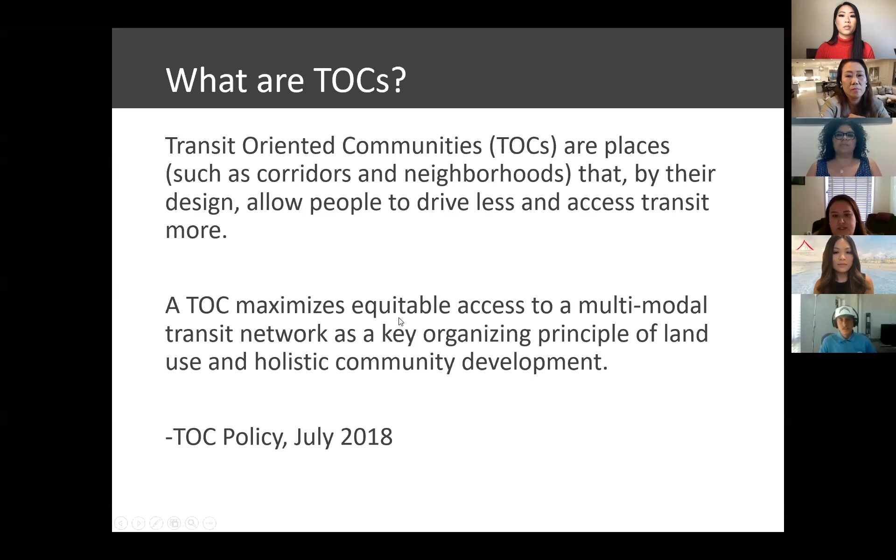So I'm sure folks have heard the term TOD before, transit-oriented development. That typically focuses on a single site, whereas with TOC, we really look for opportunities to maximize development and look at ways to really connect communities to transit.

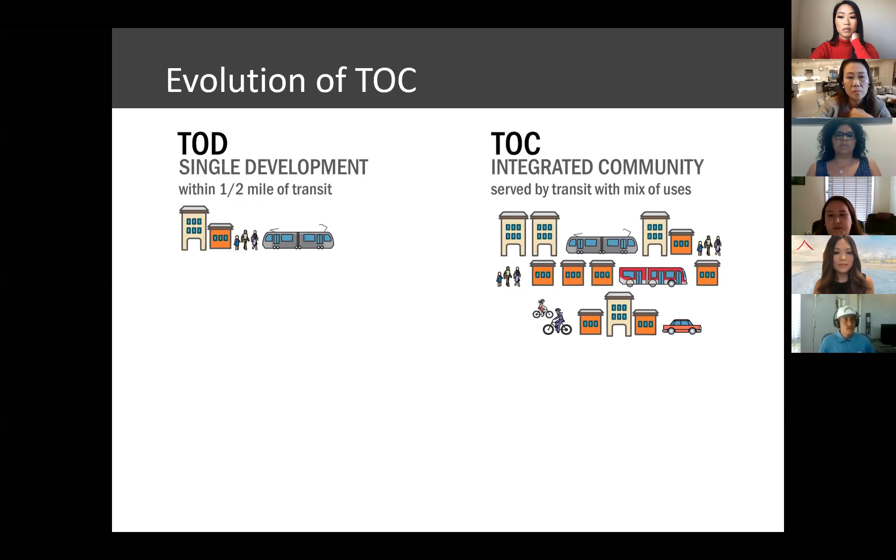So I specifically work in the Joint Development Department within countywide planning.

So Joint Development is the program through which we partner with private developers to build TODs on Metro-owned property. Some of the goals of JD are to support the community's vision for the station area, ensure high quality design, encourage housing for all income levels, improve the transit experience for our patrons, and also generate revenue that we can then reinvest back into the Metro system.

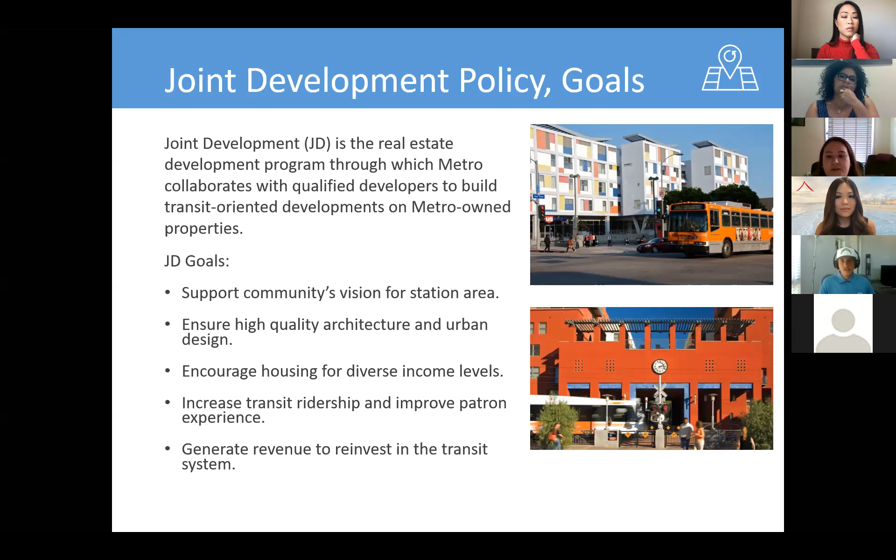We wrap those into what we call development guidelines for the site, which we then issue a competitive request for proposals and go through the process of selecting the developer for the site. We enter into negotiations with the developer. After that, we continue refining the project in partnership with the community.

And in joint development, we typically do these agreements through a long-term ground lease. It's not common for us to actually sell the Metro property to the developer. So we continue negotiating those terms. Once those are finalized, the developer secures all of their financing for the project, secures permitting, approval of construction plans by the local jurisdiction, and then they can start construction.

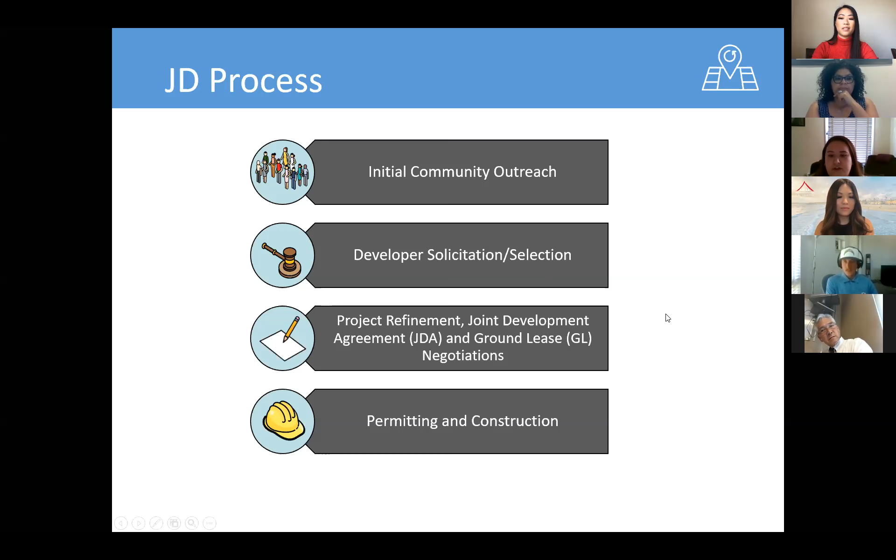So we updated our joint development policy back in 2016. And so now we have established a portfolio-wide goal that 35% of the housing units we create under the JD program must be affordable to residents earning 60% of LA County's area median income or less. And so to date, of the projects in our completed portfolio, 34% of those are affordable. And of the projects we have either in construction or in negotiations, 40% of the units are affordable.

We allow a discount to the developers in exchange for affordable housing, and that discount can be up to 30% from fair market value. We also have an unsolicited proposals policy that allows developers to submit project proposals to us that aren't in response to a formal request for proposals. We also definitely emphasize in our JD program that developers include community-based organizations and small businesses as part of their development teams.

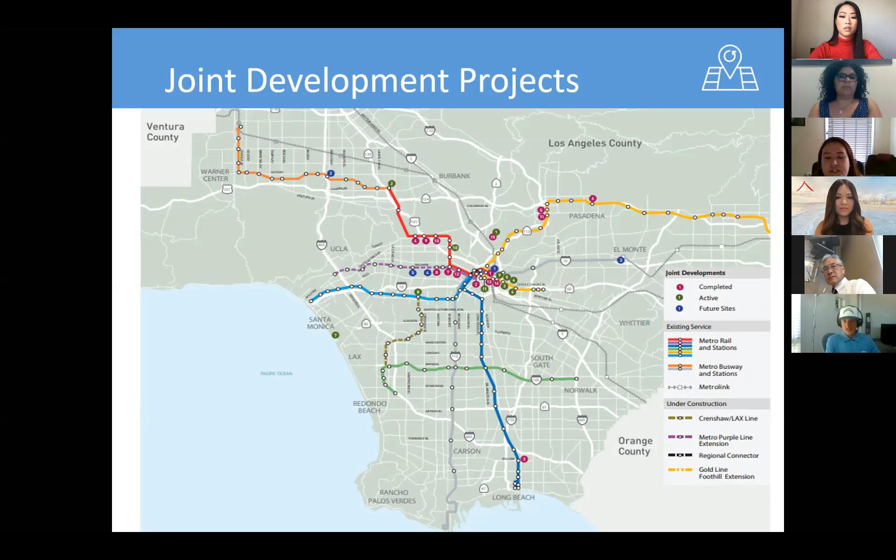So this is a nice map of LA County showing you basically our entire JD portfolio. This includes completed projects, active projects, so sites that we're currently in negotiations with a developer on, or future sites, and those are also listed here. So for the future sites, these are locations that we anticipate releasing an RFP for in the next 1 to 3 years.

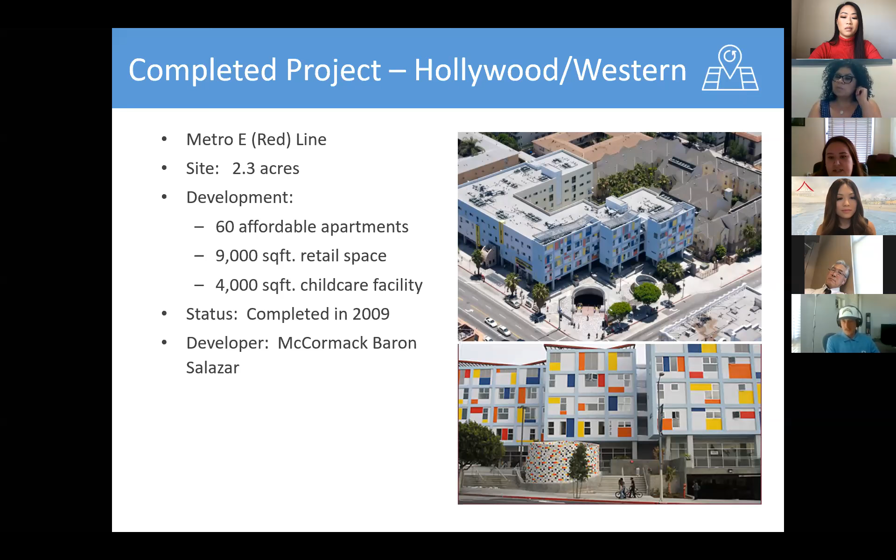And another thing that Metro is doing to contribute to affordable housing and the development of affordable housing in Los Angeles is back in 2017, we entered into a partnership with Enterprise, LISC, and LIIF to develop the Match Fund. It's a loan program, and its goal is basically to support the preservation and expansion of affordable housing in Los Angeles. It's a pre-development loan that we offer, and we have partnered with, I think, maybe 12 different organizations that we've issued these loans to. Again, it's for pre-development of affordable housing projects adjacent to transit.